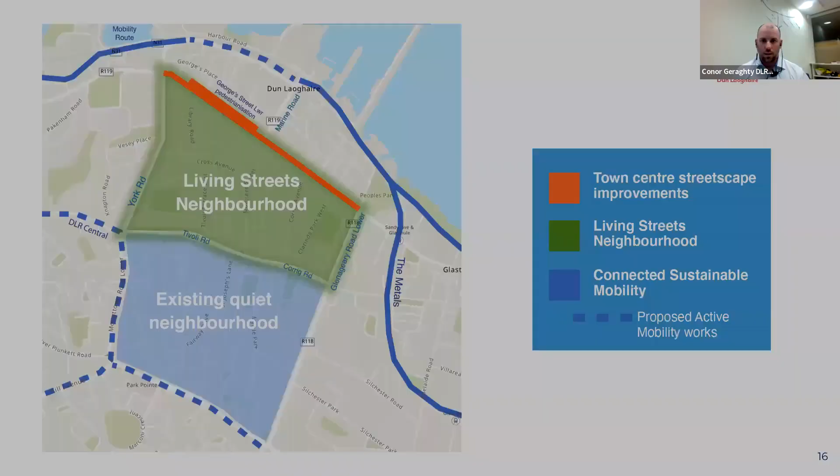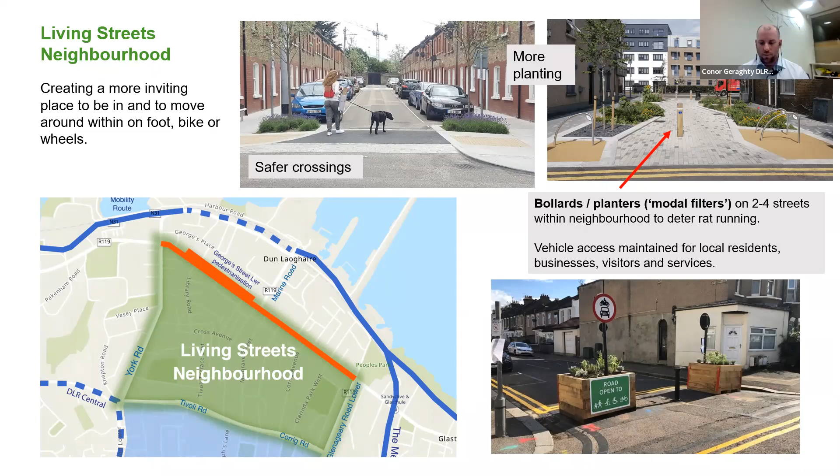On the top right and bottom right are examples of modal filters. A modal filter is where you filter out different modes - so you allow walking, cycling and bus in some instances, but filter out vehicles. The benefit is that it allows space to be reallocated to other uses like parking, landscaping or seating. These are just examples of the different types of interventions we're considering.

When all this is completed, we hope to have a safer walking environment. We want access to the town to be maintained for bus and rail users, but also for those driving - if you choose to drive, the access is there for you.

We want better connections between the existing walking and cycling infrastructure, and signposting and wayfinding is a key objective as well, to make it legible to everybody - so regardless of which mode you choose, it's easily understood how to get to and get around Dún Laoghaire.

To talk a little about what we've done to date - we've reviewed all the historical data, including policies and reports, and the data collected during Summer Streets. We've carried out topographical surveys, a 3D generated AutoCAD model of the entire town, where we measure every tree, every curb, every double yellow line, every road marking, which gives us a map that we can generate designs off.

We've done a GPR survey, ground penetrating radar, which maps all the underground services and allows us to design where we can put trees or planting, or if we have to alter any existing services. We've reviewed all the existing trees in terms of their health and whether they might need to be replaced, or if additional planting is needed.

We've identified key issues, and the Summer Streets report has made recommendations, or a list of things that had to be considered as part of this project. I've included them in these slides more to reassure people that we're aware of things like parking, loading, access, bus routing, connectivity to areas like the hospital - we're aware these are very key challenges that have to be addressed as part of this project, and we're not going to shy away from that.

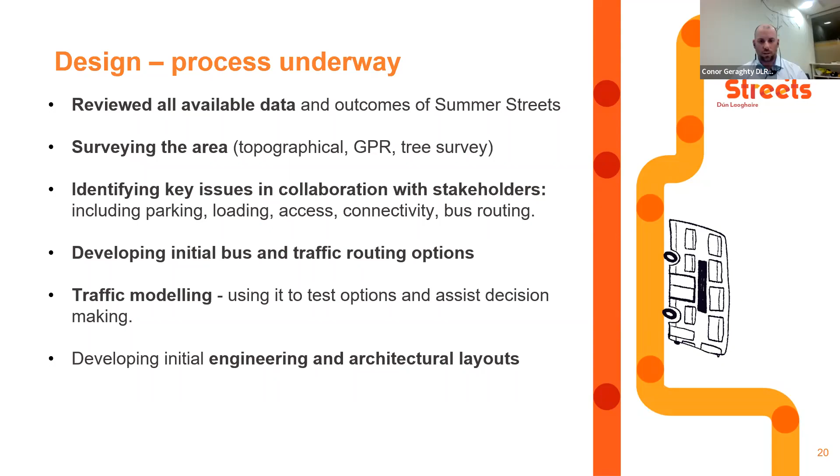As I mentioned, the bus routing option is a key issue we have to address. If pedestrianisation were made permanent, it would impact bus routing, particularly access to the hospital, so that's something we're continually working on with the NTA, the bus operator provider. Getting good connectivity between sites and the wider community is another thing that has to be achieved as part of this project.

As part of that, we're looking at modal filters and the impact on the wider traffic network. Signage and wayfinding are important for legibility, particularly for directional signage for vehicles, but also signage for car parking options. If parking spaces are available, it should be easy to understand where they are via road signs, a parking map or app, so you can plan your journey with confidence there'll be parking when you arrive, avoiding having to roam around Dún Laoghaire if you're using your vehicle. Inclusivity is also very important, so it accommodates everybody of all ages and abilities.

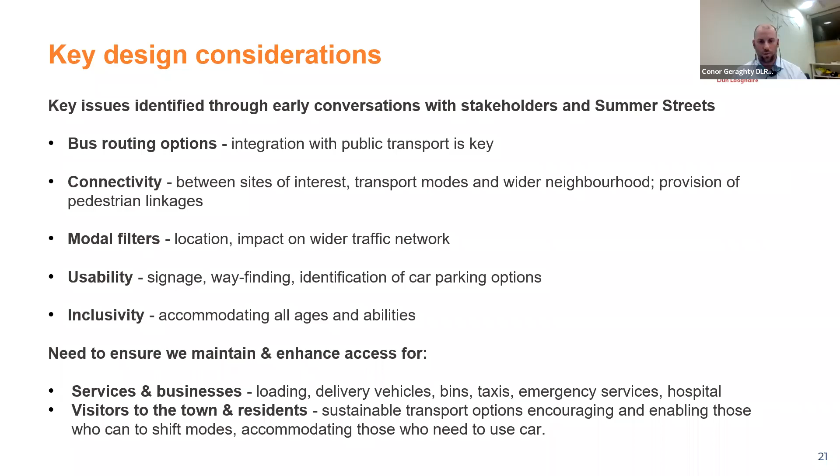We also have to maintain access for services and businesses, for day-to-day maintenance including deliveries, bins, taxis and emergency services. We're keenly aware these issues have to be maintained, and we're addressing them as part of the project. But we also want the town to be very accessible for people visiting, and for residents, so that when you choose to come to Dún Laoghaire, it's a very easy and inviting thing to do.

It takes about 72 hours to do one run of the model, and it gives us information like where people are coming from to get to Dún Laoghaire, where they're leaving Dún Laoghaire to get to, and a real understanding of travel patterns and trip types in and out of Dún Laoghaire.

In addition, we've generated a local area model, because a model on the scale of the Greater Dublin area would be too broad and wouldn't provide enough useful information at a very local level. This local area model has been validated based on the Eastern Region model, but also on traffic count data collected at 33 points around the various locations.

Then we can make changes to the road network and test what effect that would have on the traffic. We can also make changes to the signals and predict if the movement happens as expected; if needed we can alter the signals, giving us confidence that the network will function as intended if any changes are made.

For this project, we really want to try and encourage as many people as possible to get involved, and are offering a variety of ways for people to find out more and have their voice heard. Obviously, it doesn't suit everyone to do things online, webinars don't suit everyone, online surveys, etc. So through the preliminary design phase, which we're in now, and the statutory consultation phase, when we submit for planning around April, we'll be running a range of different ways for people to get involved.

That will include online surveys, we have one currently live on the Citizen Space website, workshops, and meetings with specific groups. We hope to have a pop-up shop on Dún Laoghaire Main Street, open for a week or two during the statutory period. That's really for people passing by who might want to drop in, but equally for people specifically interested in discussing some issues.

We have a pop-up planned for the library. We haven't got a date fixed, but at the Lexicon Library we plan to hold a pop-up in the next couple of weeks. We're also holding a drop-in information session next Wednesday afternoon in the local school on Convent Road. We'd encourage all of you to come along there.